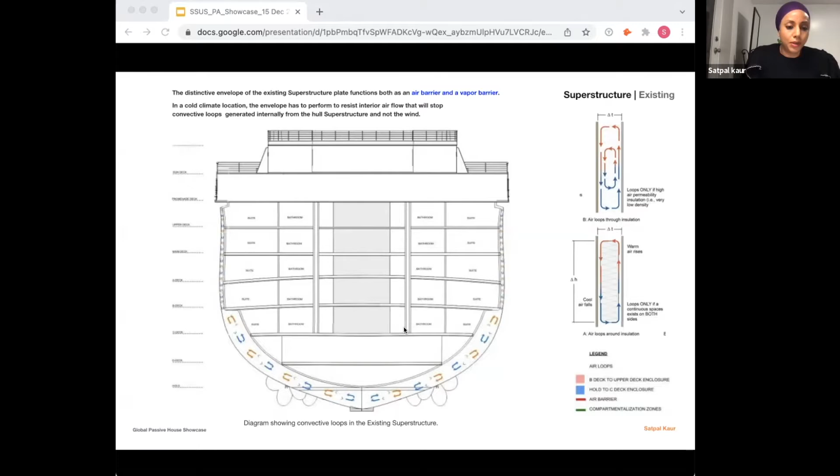But then it does something interesting. In the case of the ship in a cold climate, the envelope has to perform to resist the interior airflow that will stop the convective loops that you see at the bottom and at the sides of the section of the ship itself. And this is because it forms a double hull. These convective loops aren't really caused by the wind, it's actually just because they're hollow. So we were looking at how to think of it as a retrofit versus just changing the look of the ship, because it was an icon, and we didn't really want to do that.

And we knew what worked with systems. We knew it needed a complete air barrier, and it had one, technically speaking, because the outside of the superstructure was acting like that. But it also needed some form of compartmentalization, which we know also helps in terms of performance. And it would also reduce the convective loops happening alongside the actual hull skin of the ship as well.

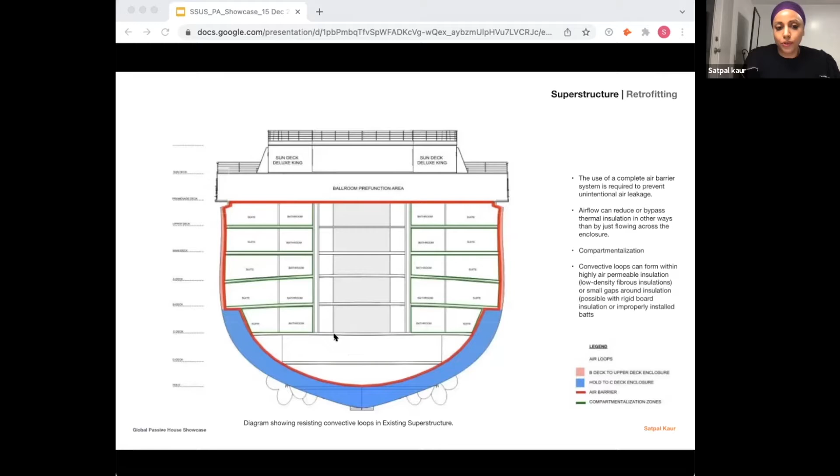So we started digging down further into the actual ship and how it was generally constructed, because we needed to place a lot of systems, we needed to insulate it. And how do we do that? Because we were also lacking height. We didn't have much height to run a lot of ductwork, and we definitely didn't want to reduce interior space as well.

So as we started looking at the ship, it actually consists of a series of bulkheads, and they serve so that if any kind of water would enter, it would just drop down, as you see over here, and they would prevent water going from one compartment to the next. So there were 20 watertight compartments, and out of the 20 watertight compartments, you had 8 of these bulkheads.

But what I saw in this was more than that. And this is right at the beginning. What I saw instead was, wow, these are hollow spaces. This is great. This is what I need to run systems. And from the hold, it's no longer first floor, second floor, third floor; the language completely changes. So you have to speak the language of what the ship is.

So in this case, in the hold, you have the double hull. And then once you get to the B deck, which is above, now you're emerging out of the water itself, just about here, and the double hull actually changes. And I'll show you what I mean by that.

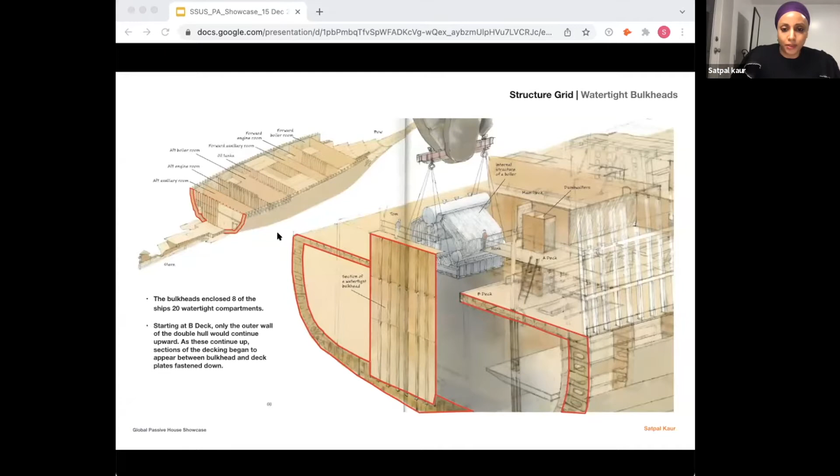So this is a section cut. So these are the series of the structural grid of the existing ship that runs continuously, which acts as, we would say, to some degree, compartmentalization, the watertight bulkheads, etc. But what happens is it goes from being 9 inches all the way from the hold to C deck, and then it becomes 6 inches and then smaller.

And that was the opportunity that we needed really to run a lot of these systems that we were thinking, obviously not from the bottom, but could we use this double hull frame as we're retrofitting it to run a lot of the electrical, the mechanical, and even the insulation? Like, how could we utilize the space, which is not really being used, reinventing this whole thing about what is this space going to be?

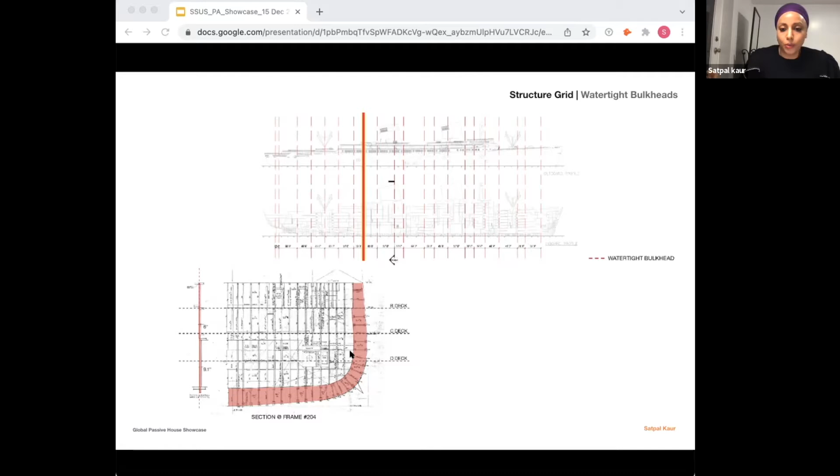And so we firstly looked at ways existing ships were doing compartmentalization, because some of the programming of the space meant that we had to look at our space differently too. And just with buildings, I was seeing a very similar language. For example, you would have the unconditioned space where you would run a lot of the mechanical systems, and obviously above you'll have a lot of the conditioned spaces running. And this is how they pretty much do it in the marine naval world right now.

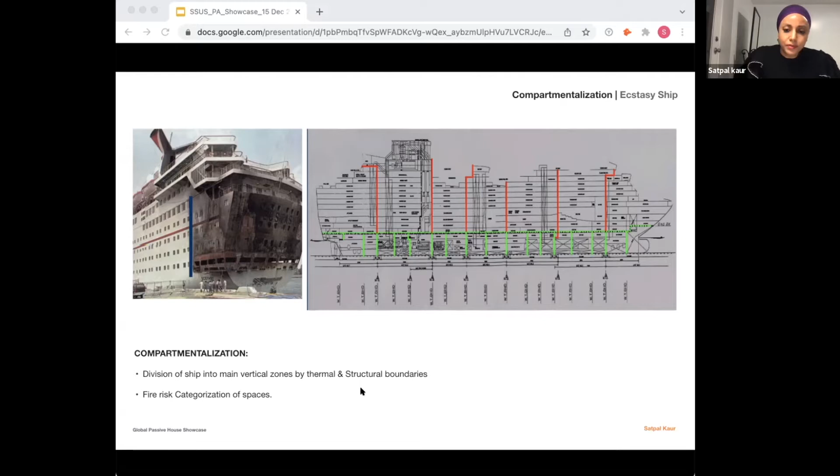And it works. It's actually kind of interesting how they look at this as a division of main vertical zones by thermal and structural boundaries, of obviously fire risk categorizations that they have. And for the ship, because it was going to be a building, we had to translate it into the building world. And because we were translating it to the building world, it was, at the time, what was the code thing? It was Type 1 that it fell into. And because of that, we could, if we wanted, construct as high as we needed.

But what we identified instead is we were going to use the existing bulkheads that they have, which are highlighted in the dark red, and we were going to run them all the way through down to the actual hold itself. And these will act as the 4 compartments that would actually form the compartmentalization instead. And that kind of helped us in how we were thinking about the systems in general. Oops, sorry, that was too fast.

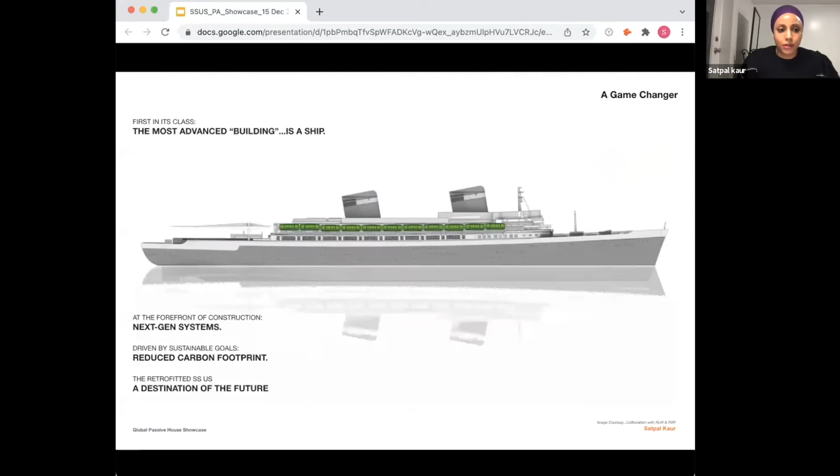So that helped in terms of where the systems would be running, because in the same way we had compartment A, B, C, we'd have electrical, mechanical, like all of these would have their own electrical, mechanical, etc. in these same compartments. So there wouldn't be a crossover, etc.

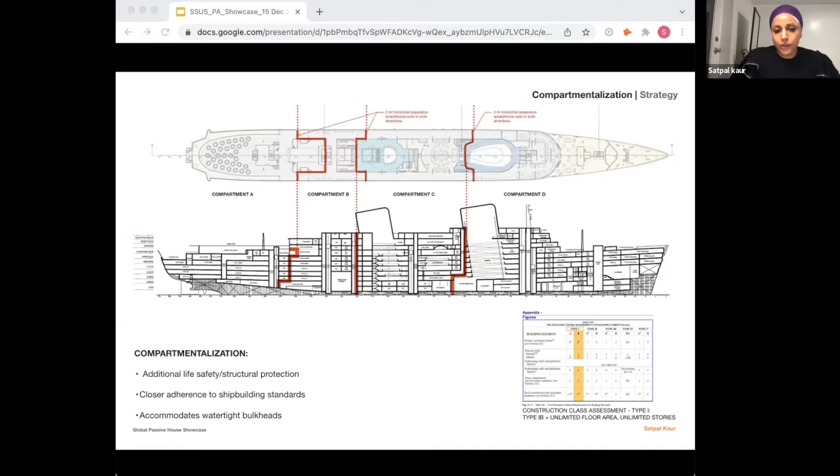And then the existing insulation that they have for new ships is actually fairly interesting. What they use is an A60 marine board, and they pretty much just put that envelope, cover it with every, this would technically, I guess, be your thermal, fire rating, everything mineral, that they would just follow the whole structure around, cover it up for fire, cover it up for thermal, and then they would run anything that's needed. And to me, this was great.

However, because our ship was old, we couldn't technically do as many of the things that the new ships would, because we would obviously be applying a lot of fireproofing on it and then working backwards from all that. So then we were back at the board and looking at it in a very different way again. But this helped in the sense of what we could achieve looking at the technologies that they already had.

So with the idealized enclosure that we already know forms a good performance in a wall, you have the finished layer outside, try to have your thermal layer on the outside, and then have your air control and vapor, etc., just before that structure, because you can control a lot of things. In the case of the ship, everything changed because here that red line was basically the outside of the ship itself, which was my air control layer, and that had to be super tight. And the ship has these series of flaps, which I'll show later in the sections, and they had to also be airtight as well.

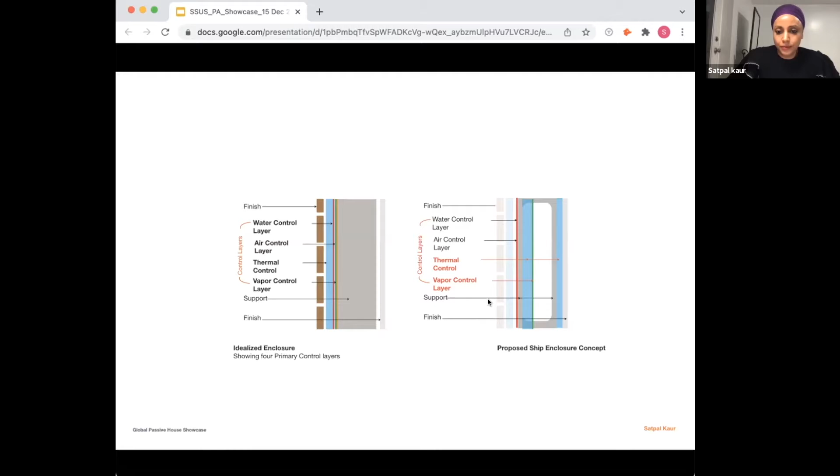And this was a section that I had to take, at the time, to RXR to basically convince them they needed to do this. And I was super nervous because I had never done a ship before, but I knew how to design high performing buildings, and I knew how to make them work. So I was like, I'm going to use that same strategy on a ship. So what do I have? I've got nothing to lose, so I might as well go with it.

And so I did the enclosure line, just showing them we're going to run the insulation just as you would do, but this is obviously a retrofit, running inside of the double hulls. And then we would compartmentalize each of these spaces on the left-hand side and the right-hand side for whatever purposes the programming would be.

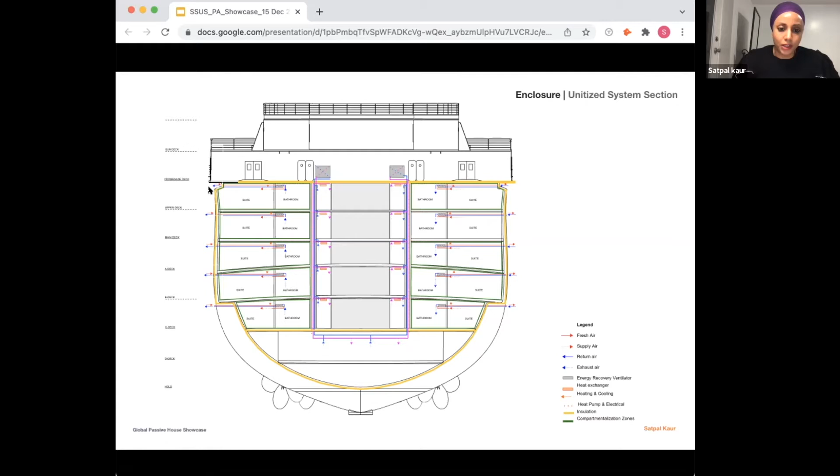And because I'm a huge fan of a unitized system, my first proposal was, why don't we have a unitized system? Therefore we don't have to introduce so many systems relying on huge mechanical work, etc. They were obviously not fond of that because there would be holes introduced, so we went back, but you can see there's a way of running a lot of these things on the inside and then along the double hull itself.

And this is the same way it would be in any kind of high performance building. You have the ERV just going straight out, and then you'll have the heat pumps doing their work. So we formed a hybrid in the next one, which is basically, we decided to go with the air source heat pump instead, and all of the systems, the mechanical, the electrical, would run on the outside skin of the double hull itself.

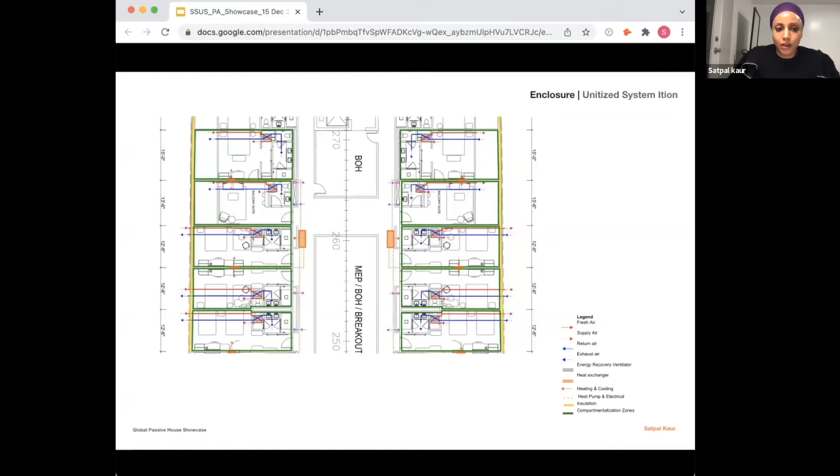And instead of actually living on the ship, we would have it plug into the mainland. So a small building would be produced for that. For the most part, the building will be able to work by itself. And this was a success for a variety of reasons, because it meant that we could do the insulation, we could run the systems,

Sorry, can you hear me?

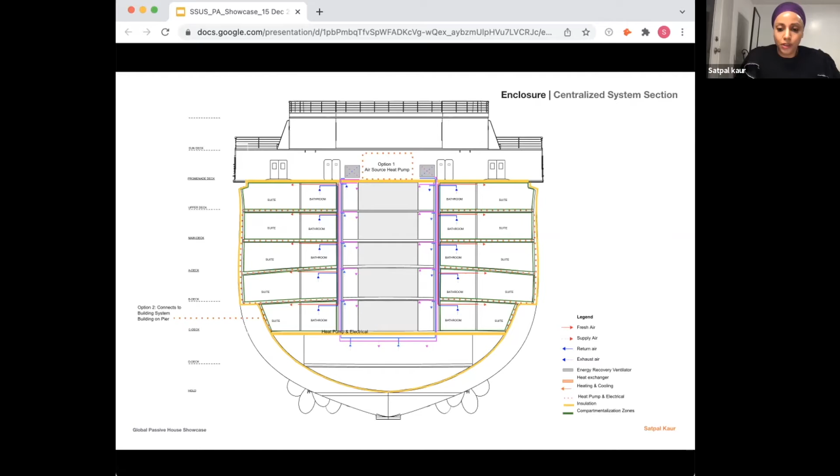So you wouldn't actually lose any of the headroom as well. So with this thinking, we actually moved forward with the ship, thinking how to design for it. And so that's the plug. It will be plugging back in to the mainland, but for most of the generation, the electrical, plumbing, etc., we would have a vacuum system for the toilets, etc.

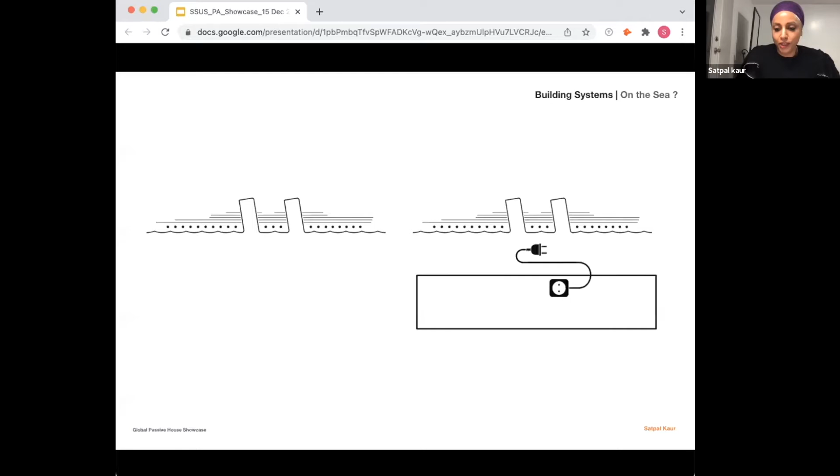So most of this I can only show big picture wise because we're still in the process of finishing it. But when it came to the enclosure, we had 3 different ways of looking at the enclosure of the ship. And this is one of the plans, and they all changed because the enclosure of a ship is not like a wall, it's not straight everywhere. And because it changes at the bottom of the hull, the first one, the baseline approach, pretty much follows what they would normally have done.

Because the double hull is quite thick, we would say, okay, fill it up with some kind of stone or water, because the ship needs to balance itself. And then on the outside, they will have the same spray foam, closed cell insulation, the air gap, Green Girt thermally broken clips holding the mineral wool, which is very common in ships, staggering it, then forming another air gap and running the final finish coat.

In number 2, the ones that you see over here, what we proposed was different. We said, for this one, can we just use a continuous marine grade coating, which they use anyway, which serves as the fire coating and as an air barrier at the same time. And let's just run that all the way from the second steel plate instead.

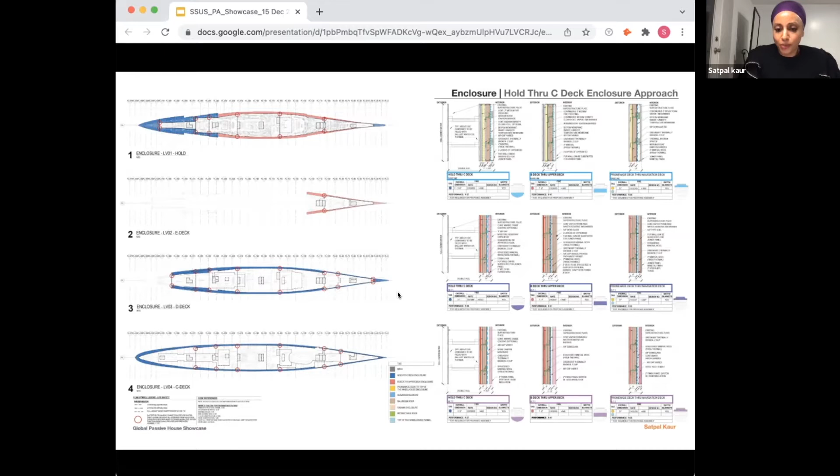For the last one, the alt 2, what we decided was that since the ship's unique nature of the curvature, we have the technology now, can we not just 3D scan this thing and the final enclosure is just put on? Like we just use a series of slots, they just get introduced and that's it. And it's actually not as simple as I would love to say, because it obviously becomes a much more expensive project, but definitely an interesting one.

And then when you come up towards the higher decks, which is the promenade deck and the sports deck, the ship is no longer part of the double hull system. And you can see this in plan now, where it's actually offset from the hull itself. And the way we had to think about that was literally like a building. You're going to be putting a building on there. So how do you make that building airtight?

And that to me was fascinating, because this whole floor from basically promenade deck onwards would just be compartmentalized altogether. So the floor below that would actually act as its own volume, and then the floors above would become its own conditioned space.

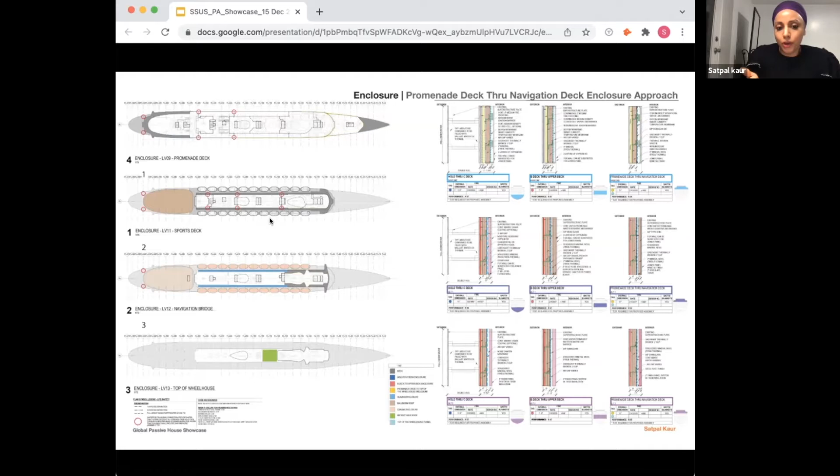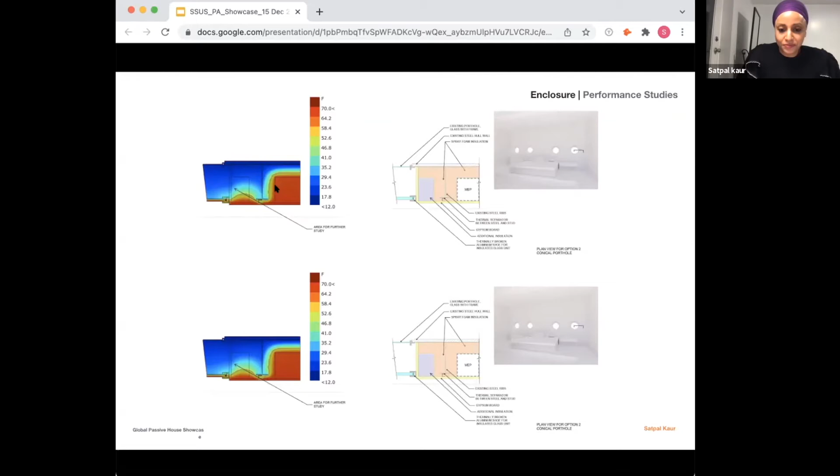These are some THERM studies that we had done when we were looking at understanding how the ship is performing. And obviously, it would be cold because it's metal. And when you add insulation, it starts behaving better, which we all have known, but it's good to see that still. And so it allows us to understand where we could improve and how we can design differently with the ship. And this is a section of that THERM as well, where we get to see the cold and hot spots. So obviously we have some thermal bridging happening there.

Again, putting it back there, understanding it better. These MEP things would no longer run here. They would pretty much run in this space over here instead.

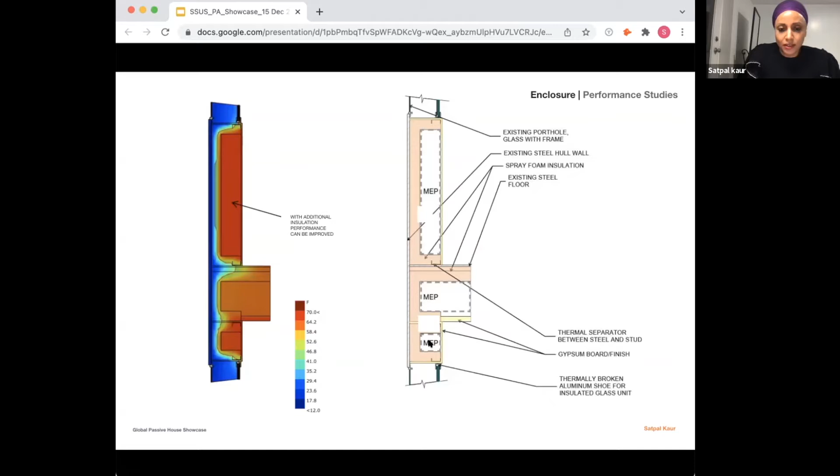And as any designers with a ship of this nature, they really wanted to embrace the whole ribs that the ship had. So with the main hull, expressing the ribs became part of the design thinking, and therefore it became part of the enclosure thinking. And how do you make this system still work when you want to make it high performing, when you want it to reach net zero, when we're trying to not be wasteful? And it really meant for something like this, we had to go back to that whole 3D fabrication system just because of the nature of the shape of the ship.

And we continued with the same thing, saying, okay, it has its air barrier. Over here, it has a series of laps, and then each lap, as the ship is made, will get a series of air seals done on it, so it's completely tight. And then after that, we'll do the whole fireproofing, and then the spray foam, and put foam blocks around the windows here. And this is a plan and a section showing this.

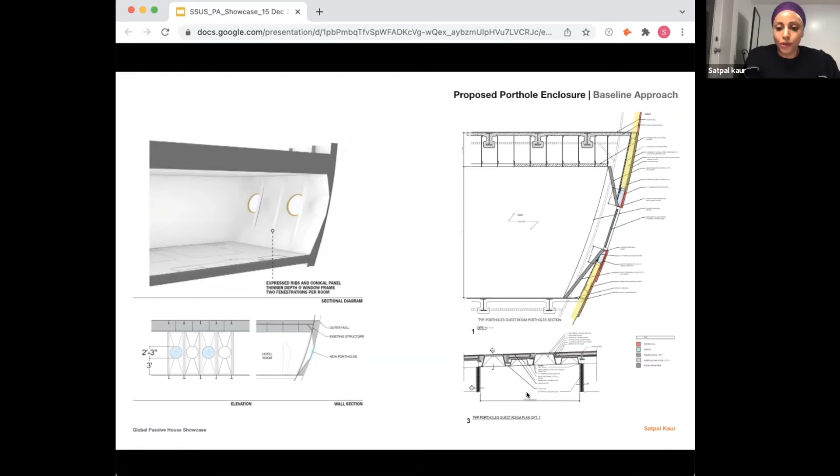So that's pretty much big picture wise what we tried to do in a very intense period just before COVID. And it was a lot of work, a lot of scrambling. And one of the things that was interesting, as I was saying, when you get to the promenade deck, things change. And one of the exciting things that we got to do with this was, okay, the king posts, which are very much part of the ship and the way people see the ship, could we reuse these king posts?

And I'm a huge fan of reusing pretty much anything a designer can. So with this, I had to do a lot of convincing, because I was like, why can't we just run a lot of the ERVs through our king posts, because it doesn't serve anything. It's just there. It's not really doing much. I mean, we used it for structural reasons in terms of putting out a cable support system. So it kind of looks like the whole ship is coming out. And we wanted to be more part of its history, to be technologically forward thinking, really embracing that. So I proposed, let's just go all the way.

Let's run the ERVs running through this, the king post that we have. One will be the return, one will be the supplies. This particular programming space that we had designed, I said, is capable of having the air source, small heat pumps actually being part of the roof. Let's design a different type of roof where the air source heat pumps can sit on the roof and we can vent it out. It doesn't have to be something that's treated separately. And that to me was really exciting, because all this would be obviously coming in, being prefabricated elsewhere, and just basically being put onto the ship itself.

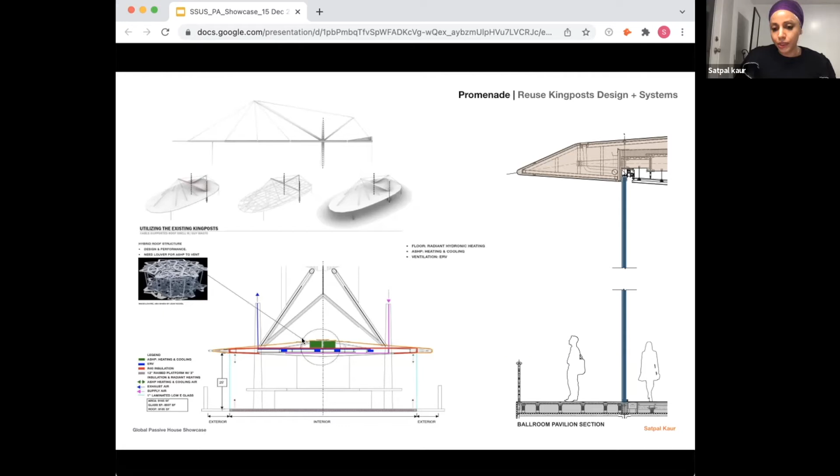And it was these systems that a lot of people, especially with air source heat pumps now becoming more available, it was a lot of just investigating what is the smallest size we can get. How do we get this looking as minimal as possible? How does it fall with the aesthetics of the design and still be revolutionary in what the history of the ship is? So that was the actual promenade deck itself that we got to propose this for. And then this is how it would be if you wanted to ever get married or redo your vows. This is how it would look from the inside. So these will be your king posts, and this will be the time you actually take your vows and have that perfect time.

Oops, that's too fast. So one of the iconic things about a lot of these ships, especially the older ones, is the lifeboats of these ships, and they're amazing. Unfortunately, they are there, but they're not usable. And I really was interested in creating a very different way of looking at this with our team. And so we kind of saw it as a car technology instead, where you will still be able to enter these series of lifeboats, but a different type of experience. And what we proposed instead is it will keep the same kind of square footage of the existing lifeboat, and you'll be able to access them from the promenade deck, which are these over here, and you'll just enter straight in.

And it has, again, the same principles of any high performance building, where we would run just like any car. You would have that whole insulated shell, but this would just have that shiny metal stuff, and it would just be something that just comes on. So you'll have the enclosure with the insulation and then the whole air barrier system, and we would run the majority of the systems, at least for the plumbing, etc., here, and the ERVs would actually be hosted there, and we would just vent them straight up from the top of the cabana itself.

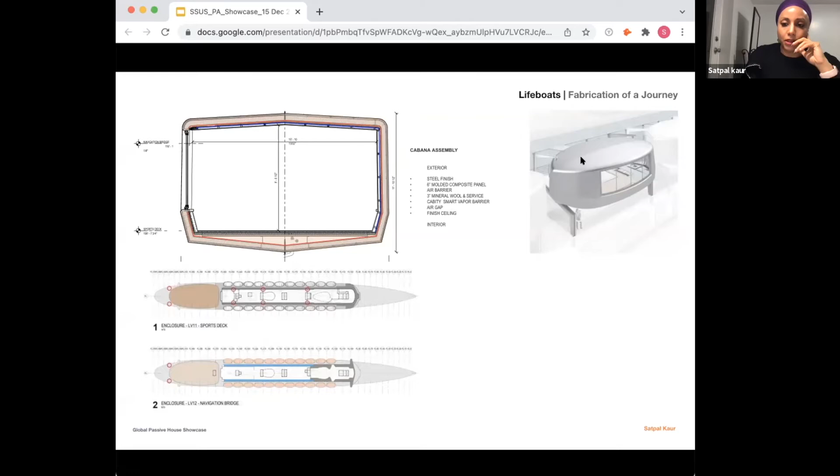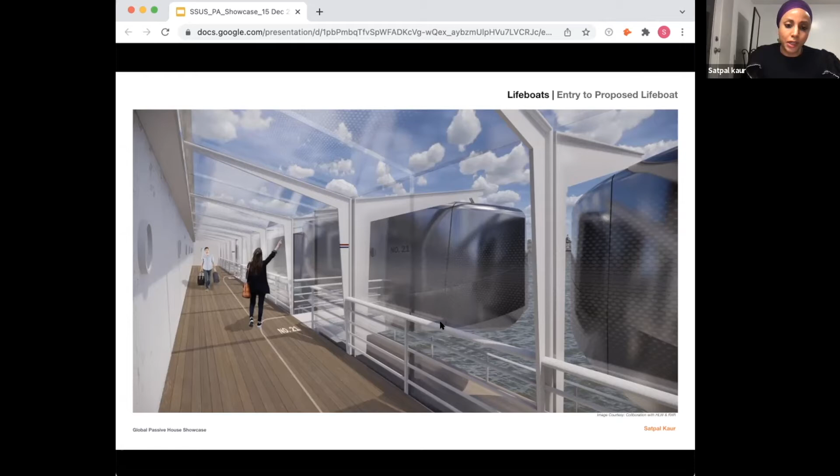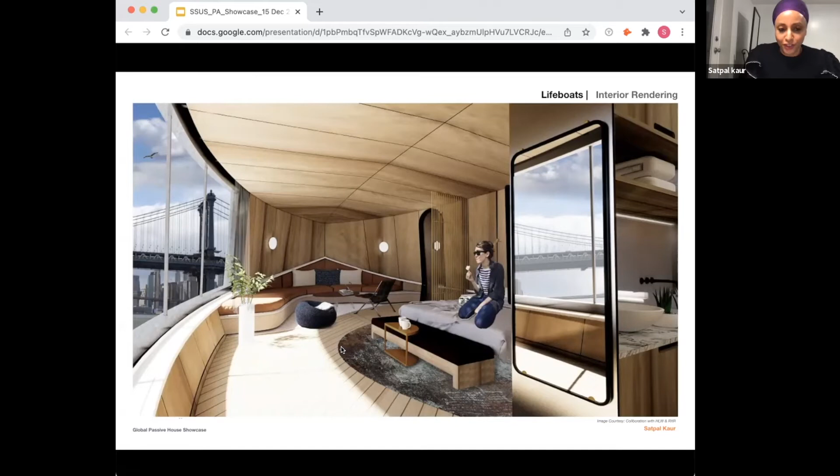And this is a view going towards that, so you kind of get to experience the new and old, and you still get to have the structure being intact. And this is a view from the inside. So even though you may not have the old boat, you still have the experience of the old boat, you have the experience of the new version of it. And so one of the things I liked about this particular project was, and I realized as I was working on it, it really was a retrofit, and it didn't really occur to me, because a ship just seemed like a ship, but I guess it is a retrofit project.

So one of the things I find interesting when I look back at this, can buildings be done like this when we're thinking about resiliency? Are there other objects other than buildings that can still form this? Because it seems as though it's doable, we have the technology now, we have different ways of thinking about it. And as flood levels continue to increase, what are the different typologies that we're putting out there, which might not normally be considered buildings, and they become buildings? And this was one of them. And I'm super excited to see what are the next steps for this. So we'll see. And so far, this is where we are as we just hold tight with COVID. But thank you so much.

Excellent stuff, Satpal. And Zach, we'll go to you first. All right, great. Let's see here. Great, Paul, this is amazing. I'm looking forward to the questions.